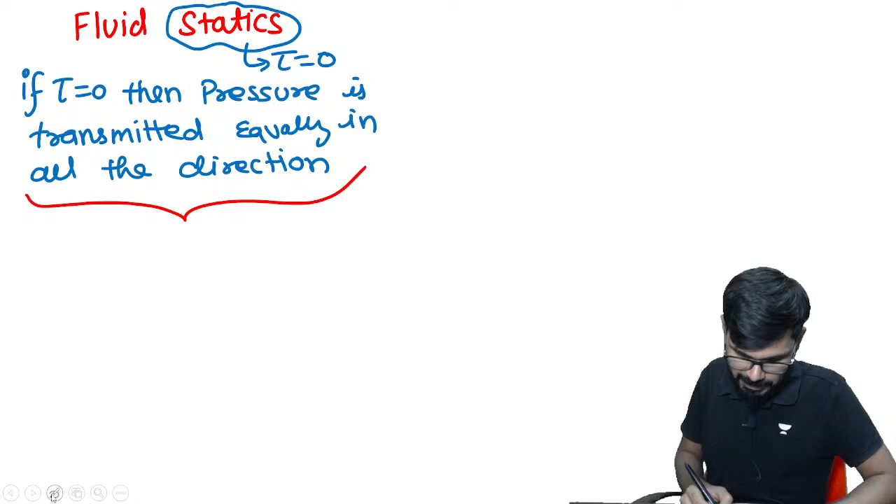So now this is basically known as what? Pascal's law. This is a simple form of Pascal's law, right? Detail we already discussed of Pascal's law. Clear, right? Now Pascal's law is not enough. So here basically one thing I got to know: if tau value is 0 and we are discussing fluid statics, obviously tau will be 0 only, so pressure is going to play a very, very important role.

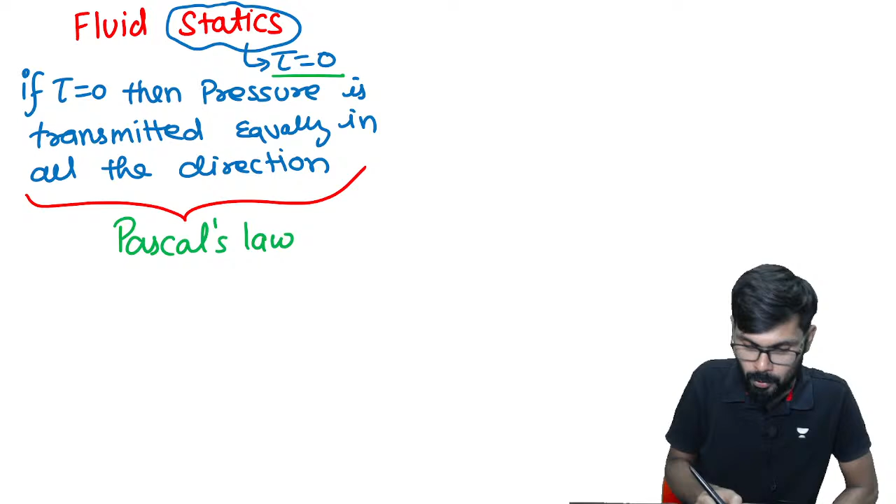So we must know how to measure the pressure, and the measurement of pressure is governed by two basic laws. The most important one is Pascal's law. Another one is hydrostatic law. So what is hydrostatic law? Basically, hydrostatic law says that dP/dH is equal to rho g, or small w. This is basically hydrostatic law.

Hydrostatic law. Now tell me, what is H? Sir, H is the distance. Distance from where and in which direction? Sir, this H is measured from the free surface in the vertical downward direction. If you are moving in the upward direction, then minus w will come. That we already discussed.

Now I'm going to talk about pressure at a point. Suppose this is a free surface, beta. This is a free surface, right? And our point is exactly here.

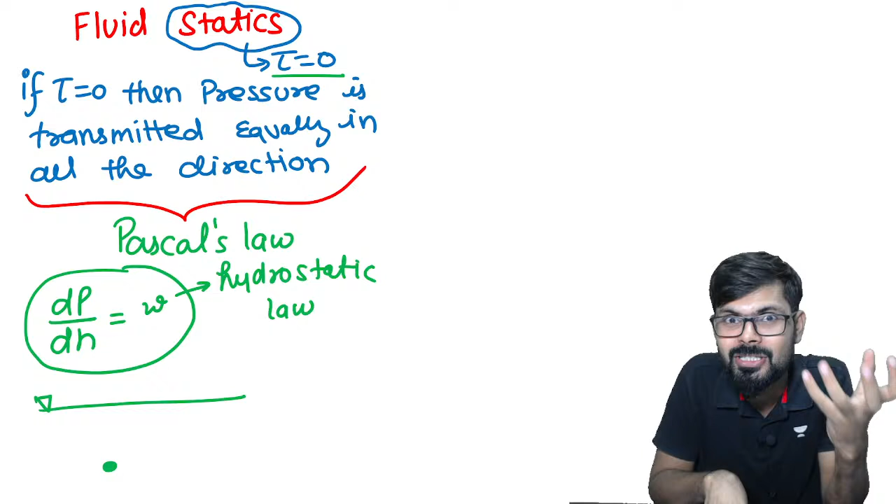Whatever I'm teaching is more than enough. No need to refer any book. Time is gone for referring books; very little time remains if you have just started your preparation. Even for a top rank, PSC or interview, 80% of things will be covered here. Most students studying from YouTube don't value the content because it's free. Don't compare value with the price. The price is 0, but the value is not 0. This is your need, so it has great value for you.

And whatever I'm writing here is basically the short notes. If you study this much, I am damn sure there's a 95% chance you will be able to attempt all the problems of fluid mechanics, and even as a short-term course, you are going to solve at least 80% of the questions. Don't worry, trust me a little. Nobody trusts me. Whatever I'm teaching, that is enough.

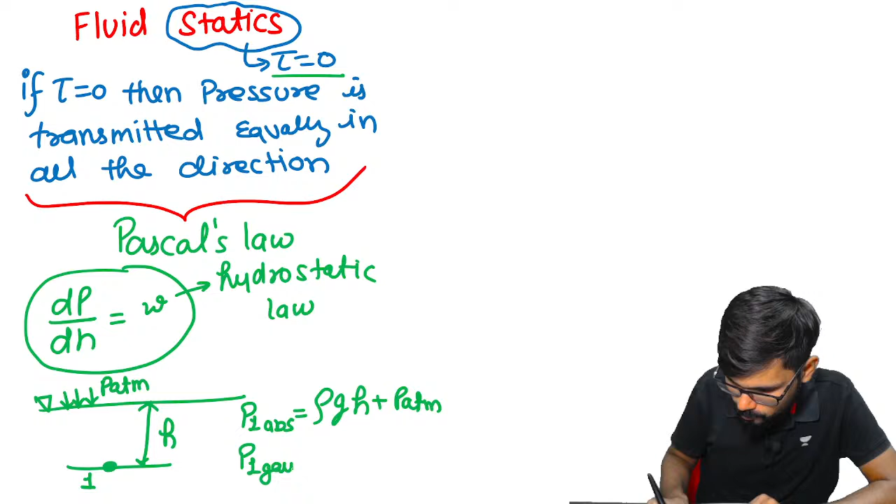Okay, so suppose this height is h. Here the pressure will be P_atm. Let's say this is point 1. At point 1, if I calculate the absolute pressure P1, I'll get rho g h plus P_atm. Now if I'm calculating P1 gauge, then it will come rho g h. Clear?

Clear hai? Any problem? No problem at all. Okay. Good evening. Good evening.

Good evening. Now please listen here carefully. This is all about Pascal's law and hydrostatic law. That is going to be useful for us. Now one more thing I would like to share here, that there are 7 total units. Units are very important.

The first unit is Newton per meter square, I told you. Second unit is, I told you, Pascal, correct na? Third unit I told you kgf per centimeter square. I'm not writing the conversion, that we already discussed. So this is kgf by centimeter square.

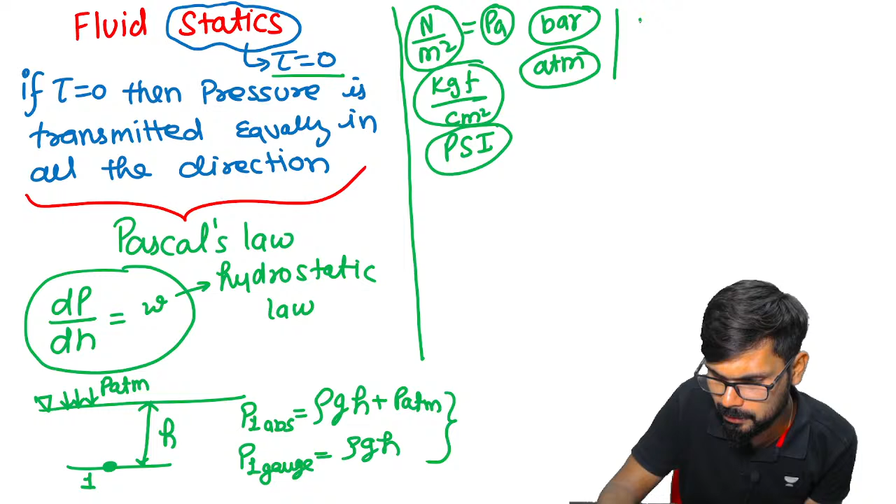Now the 7th unit is what? 7th unit is basically height of liquid column. This is very important. Height of, or length I should write here, because it's not necessary to be height only, it may be inclined also. The length of liquid column. Clear hai? Now please listen here.

Any pressure can be represented in terms of any liquid column. Suppose what is atmospheric pressure? Atmospheric pressure is 1 atm, or you can say 101.325 kilopascal, or 1.01 bar. Similarly, you can convert in psi and kgf per centimeter square. Now the same thing can be written in terms of height of water column also. How?

See, P is equal to rho g h, right? Now P value is how much? Here P is basically atmospheric pressure, so P value is 101.325 kilopascal. Rho value, let's say I'm writing water column, so it will be 10 to the power 3. g value is 9.81 into h. So from here you will get h value of about 10.3 meter.

So 10.3 meter is also unit of pressure. But you cannot say 10.3 meter, you have to say 10.3 meter of water column. So same 1 atmospheric pressure can be written like this. This is 1 atm only. Similarly, let's say P is equal to rho g h.

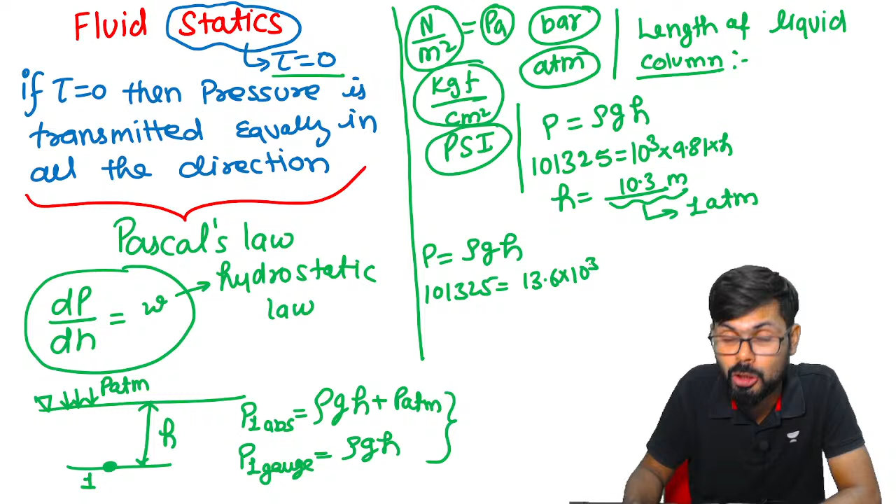I am taking P value as 101.325 kilopascal. Rho value is 13.6 into 10 to the power 3, because I am writing in terms of mercury column, then it is 9.81 into h. So h value will come 0.760 meter. So this is also 1 unit. Clear hai beta? Any confusion? No confusion at all.

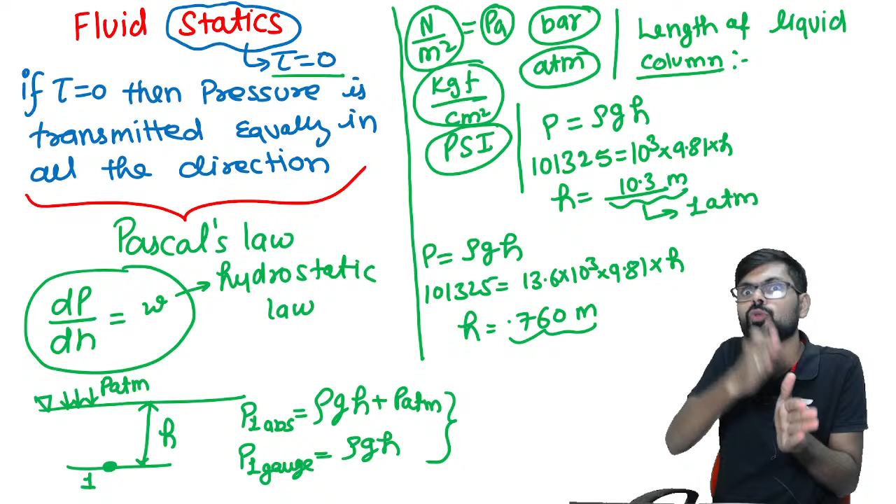Now we have two things. We can write same pressure in terms of water column, that will come 10.3 in our example. Same thing we can write in mercury column also, 0.76. So if I want to convert one water column to mercury column, how should I do? For that I told you, very simple: rho1 h1 is equal to rho2 h2. I'm not proving it again.

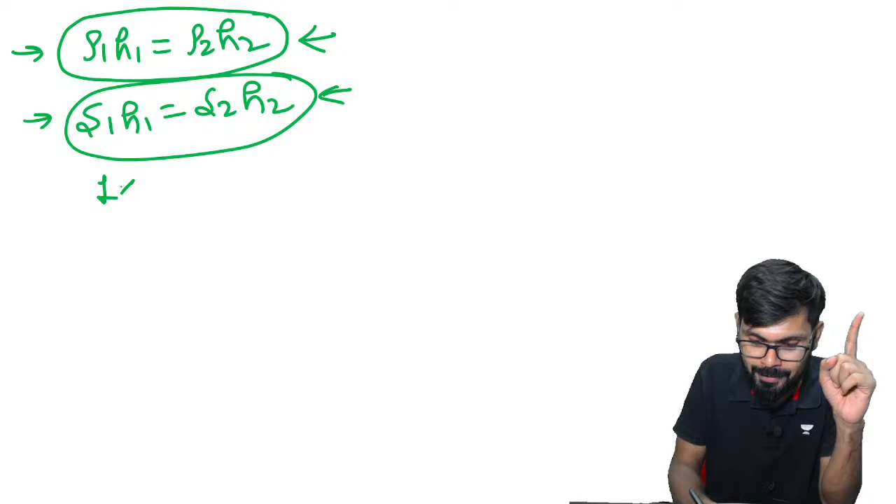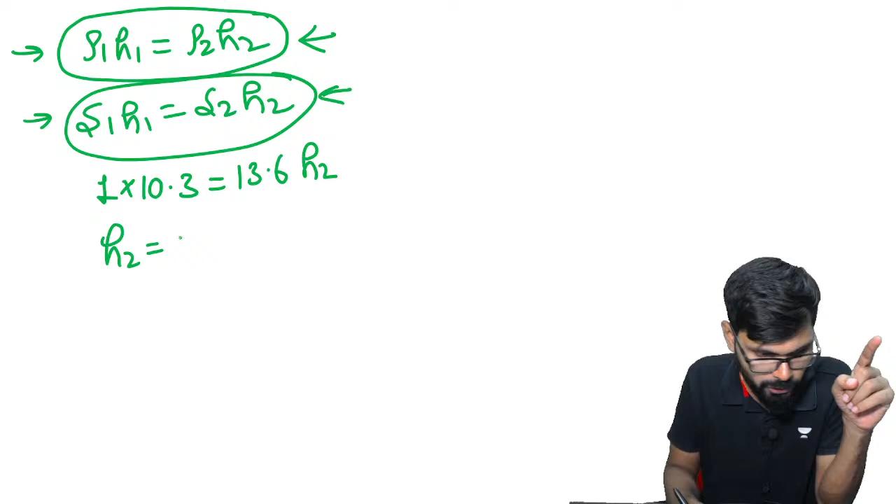Or I can say S1 h1 is equal to S2 h2. Let's say I know water column and I want mercury column. So what is S1 value for water? That is 1, specific gravity is 1 for water. h1 value is 10.3, equal to S2, which is mercury, 13.6, into h2, which we need to find out. Just calculate, you will get 0.760 meter.

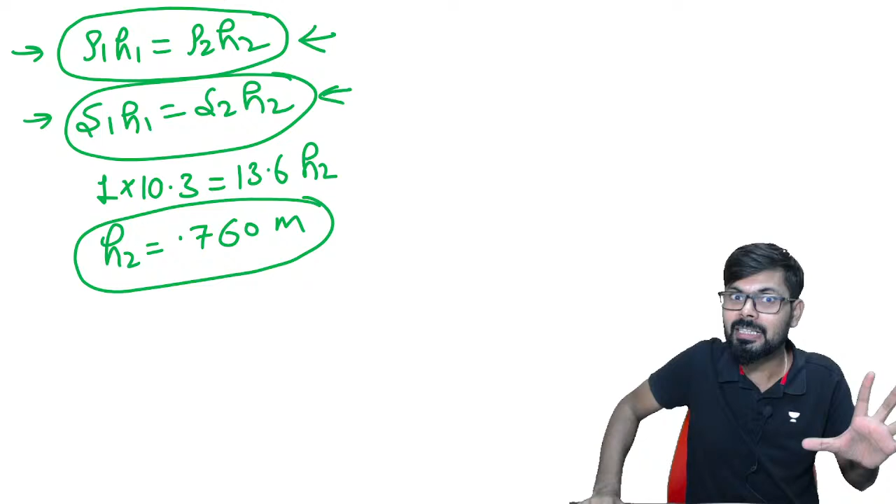Now I am going to tell you one very important concept. Just you must know it, because otherwise someone will ask you how it is possible, then you don't have any answer. See, what I'm trying to say is that the pressure at a point is going to depend upon the height of liquid column, not any other thing. It will not depend upon the shape of the container or something.

Please listen here carefully. To make it understand, I'm going to draw 3 things. I'm going to draw like this. One container I have like this. Correct. Another container is like this. Okay. Another container is, okay. Let's talk about these 3 shapes. Forget about this. Let's talk about these 3 shapes.

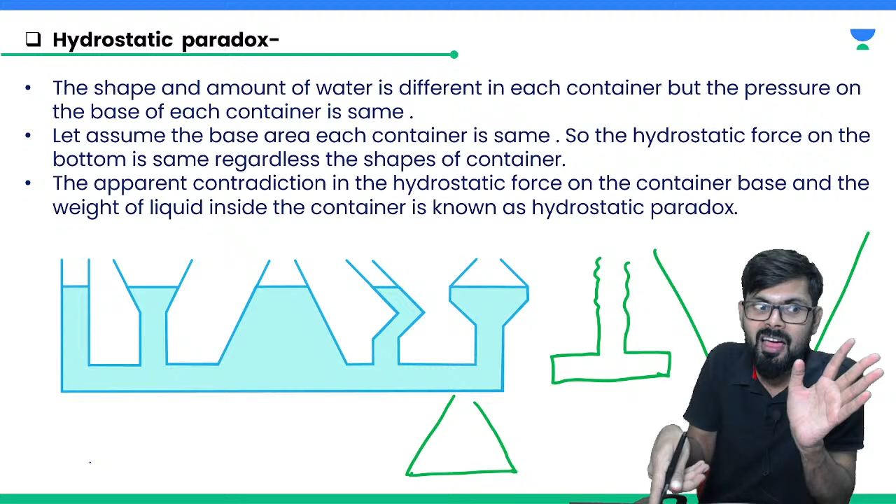Now what I'm going to do is I'm going to fill, let's say, water in all these 3 containers. This is a first container, this is a second container, this is a third container. Now I am going to fill the water in all the containers. Okay, this is one. Same level water. This is water. Forget about 2 and 3. Only we talk about one.

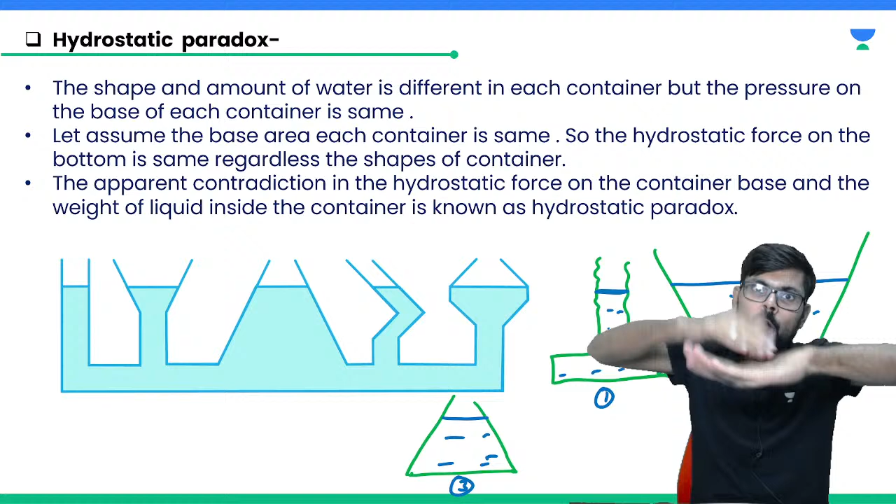My question is, whatever bottom है ना, the bottom contains how much water? That is the amount of water. So basically whatever force is going to be exerted on the bottom of the container is always equal to the weight of the fluid.

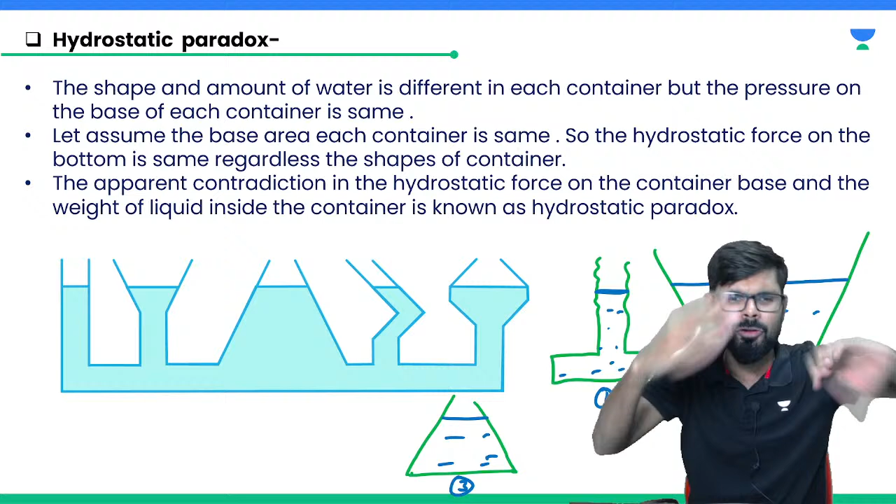Interviewer will try to confuse you like this only. First he will ask that, अरे भैया कंटेनर है, इसमें 1 kg water है, so obviously at the bottom of this one, the total force will be equal to the weight or not?

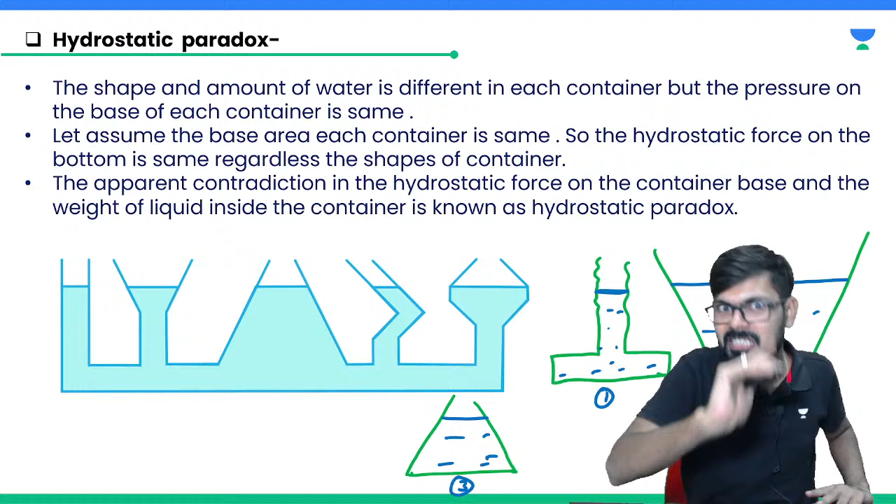Please listen here carefully. Now in this one, let's say 100 grams water is there. Level is same. This level is H. Right? Now, this level is also H. But here water is huge na. कितना? 1 kg. Here 500 grams. अभी मजा आ जाएगा.

Now, let's say the area in all three is same. This area is equal to this area is equal to this area. All area is same. All height is same.

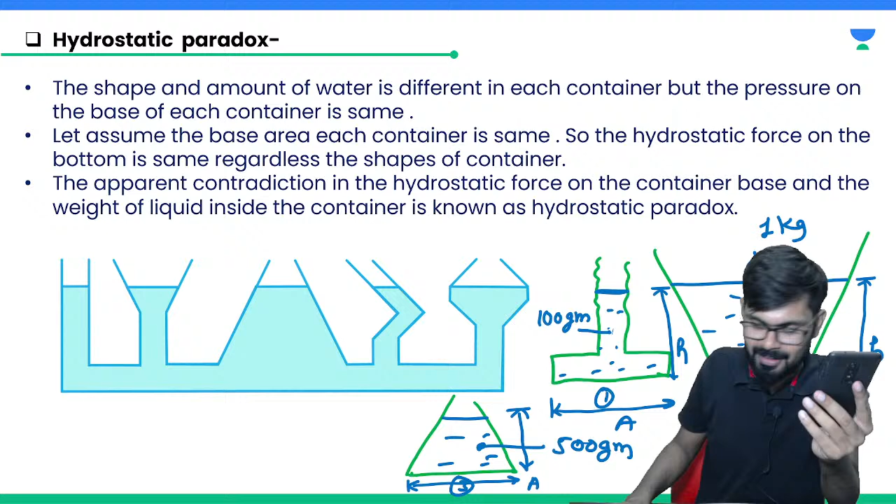Whatever I said, that is correct, na? Again I am repeating the statement that in first container the force, I am not talking about pressure, I am not talking about pressure, force in the bottom is 100 gram. In second one 1 kg. In third one 500 gram. Is it correct or wrong?

No, volume will depend upon the shape na Balaji, volume is different. Area is same, height is same, but volume is depend upon the shape na. You cannot say that it is length into width. Area into length, you cannot say volume.

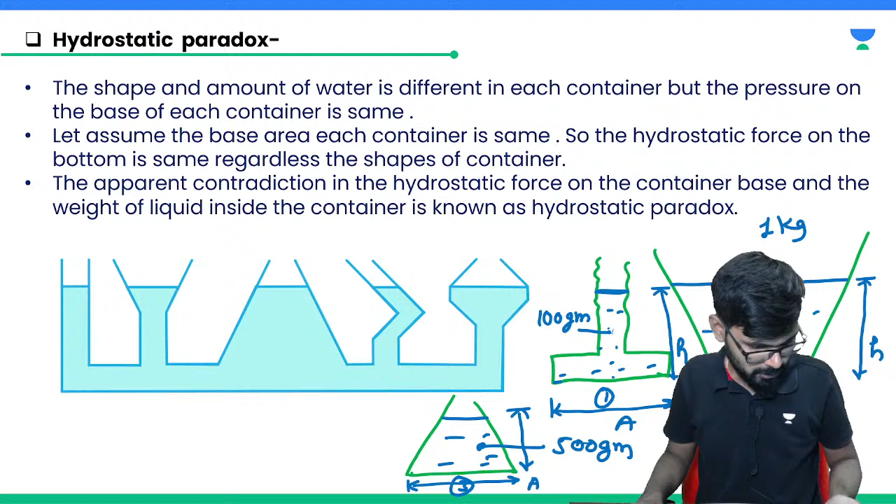Now few people are saying that sir, here the force will be same because pressure is same, P is equal to rho gh. How? Sorry sir, clear sir. Yes yes, bolie.

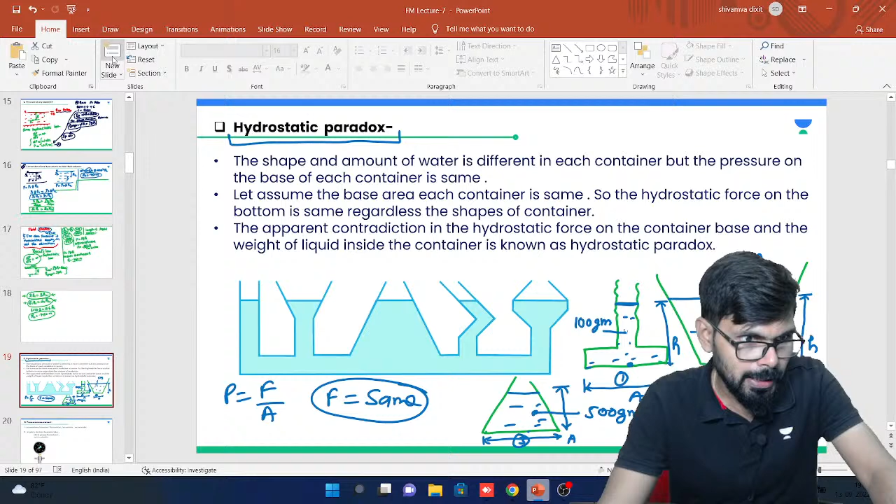If someone try to make you confused, then you have to give this particular name. You have to say that it is a hydrostatic paradox. Please listen here carefully, everyone. So basically here force is going to be same, right? Just a minute. I will just add one slide to make you understand. Please listen here. Those are same height and area, so gravity act as equally.

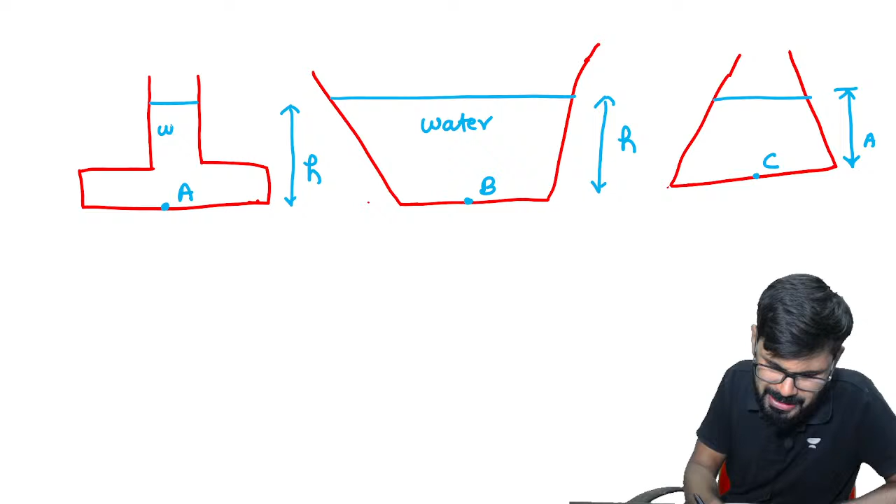Okay, this point is, let's say, A, this point is, let's say, B, this surface is, let's say, C. So now if height is same and everywhere water is there, this is also water, same fluid basically. Now, so basically, listen here, PA is equal to PB is equal to PC.

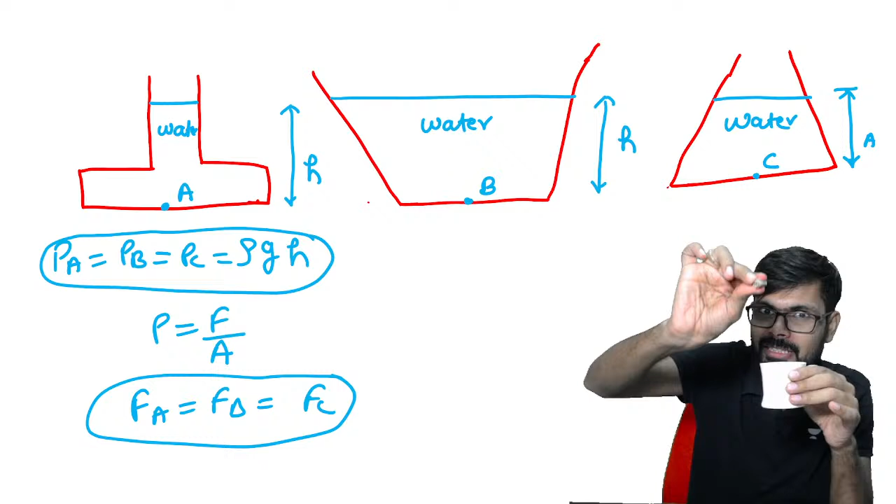If suppose here liquid is there, I am putting one hole, liquid will come out. Conclusion is that fluid is going to exert the pressure on the walls, the solid is not exerting. Solid is only in the contact, it is just touching. If solid is just touching the wall, then it will not exert any force on this unless some obstacles are there, right? But in case of liquid, even if it is just touching, then also it is exerting the force.

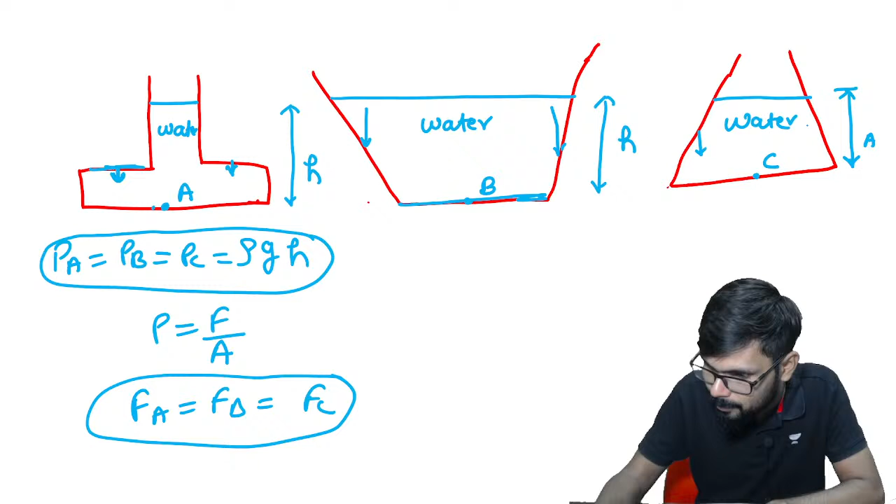So because of these reactions in fluid, that is Pascal's law, that's why this law is needed, that's why this contradiction is going to be clear by the hydrostatic law or Pascal's law basically. So if someone is asking you, this is only interview, there is no question related to GATE. If in interview they are asking why this contradiction is there, it's Pascal's law.

According to Pascal's law, this liquid is going to exert pressure not only on the bottom, it is going to exert in all the directions, and when it will exert in other directions, the solid surface in the other direction will produce the reaction also. If you calculate all these reactions, then the equation will be balanced. Don't worry about it. Okay? Understood?

There's no need to be afraid of the interviewer. Don't worry. And one more thing I'm telling you - if they ask something you don't know, then you have to bring it into the fluid mechanics area.

I hope you understand this. Suppose you are sitting in an interview. The interviewer asks you the first question from strength of material - you bounce. What happened? Bounce. You are not able to answer. Next question he asks, again strength of material, again bounce.

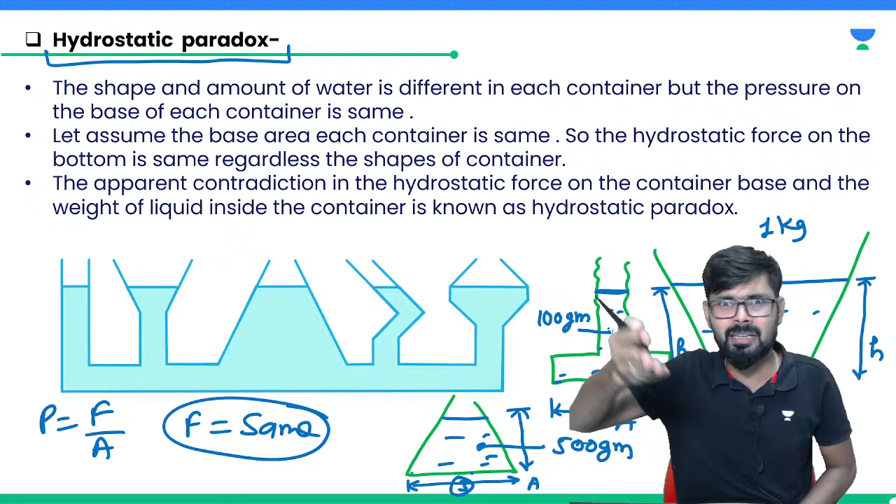At that time we started discussing this. I have that notebook, and whatever questions he told me, I wrote every question. So if you want to meet me at the Hyatt or the Taj or somewhere else, only one thing is required - what is that - rank. I'll share the rankers' photos with me at the Taj - Hyderabad Taj Krishna, Taj Deccan - I used to go to all of them with my students. Because once you get a job, an A-level job, officer grade job, or get into IISc Bangalore or IIT, after that you are not my student, you are just my friend. Then we'll go and chill, just chill.

Okay, clear? Okay, so this part is done. Let's come to pressure measurement now. For pressure measurements, basically two types of devices I am going to discuss here. One is conventional devices - some conventional devices are there, right?

Another one is modern devices, which are mostly used nowadays. Conventional devices like piezometers are there. Piezometer I will discuss, that is the most simplest device to measure the pressure.

The next one is barometer. Barometer is used to measure the atmospheric pressure.

And then another one is manometer. This is most important for us. Manometer have two types: one is simple manometer and another is differential manometer. I'll discuss, don't worry, because this is the most important one.

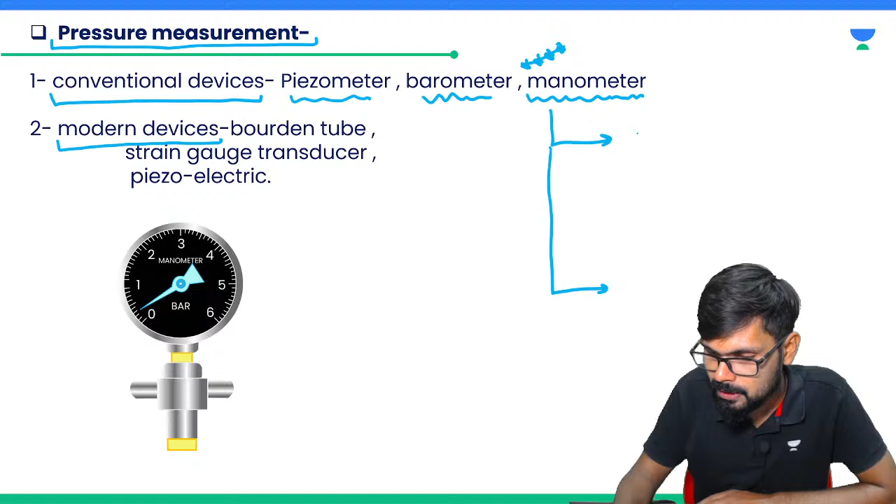Simple manometer and differential manometer. So still, simple also have 3-4 types.

3-4 types like U-tube manometer, inverted U-tube manometer in series, then single column manometer, then inclined column manometer. So these are the simple manometers.

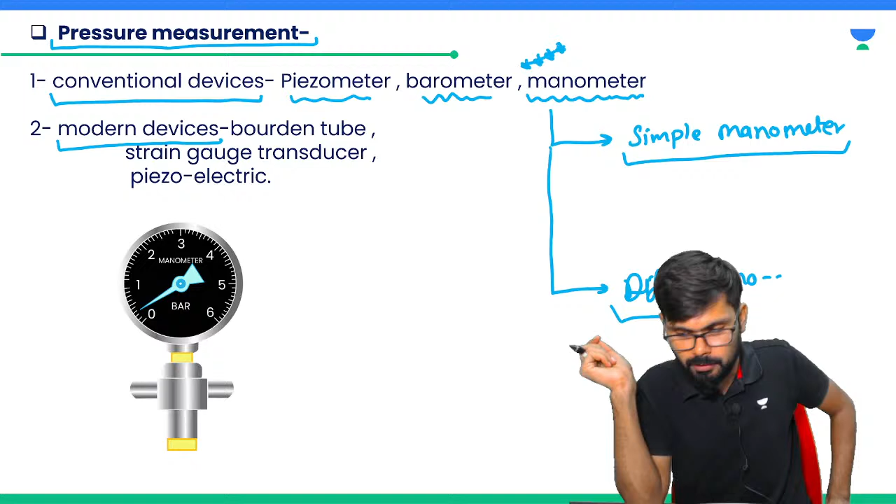Simple manometer means the manometer which are measuring the pressure at a point. What is the difference between simple manometer and differential manometer? Simple manometers are measuring the pressure at a point. Differential manometer is basically measuring the pressure difference between 2 points.

Okay, now some modern devices are there like Bourdon gauge, Bourdon tube. Strain gauge transducers are there, these are basically sensors. Piezoelectric sensors are there to measure the pressure.

But this is clearly not important for GATE, only for ESE. So in our plus platform, I will give you the idea about all these three. But here I am not going to teach, because for GATE it is clearly not important, and currently we have restrictions on number of hours, so I will not cover this particular part here.

I'll cover these three, correct. And 99% chances question will come on manometer only, especially U-tube manometer and different arrangements of U-tube manometer.

Sir, U-tube manometer I studied, but you did not study why we are using inverted U-tube manometer, how to measure vacuum pressure through U-tube manometer, why we are using, what will happen if I use U-tube manometer in series.

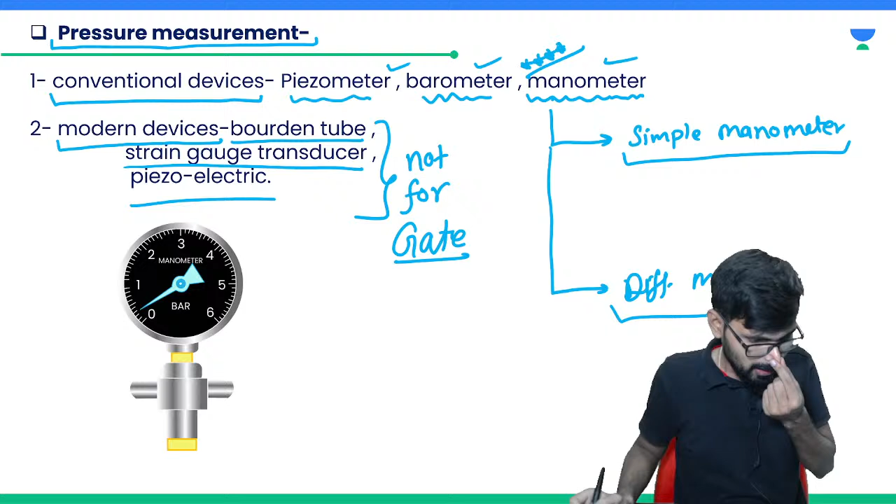80% questions will be solvable if you are only attending the class, not studying anything at home, only attending the class, making the short notes and solving the problems which I am going to solve. I am challenging that 80% questions you will be able to solve. Means out of 8 marks of fluid mechanics, you are going to get minimum 6 to 7 marks, 6 marks minimum you are going to get. This is my promise, I never break my promises.

You can ask any of my girlfriend, I'm telling you, right?

So these are basically simple manometers. Simple manometer means manometer which are measuring pressure at a point. So these are basically U-tube manometer, single column manometer, inclined. In U-tube also a lot of arrangements are there, different arrangements are there. Why those arrangements are there, how to use that, everything I will tell.

Next, differential manometer. Differential manometers are basically measuring the pressure between 2 points. These are 2 piezometer method - take 2 piezometers and use them. Then another option is U-tube differential manometer. U-tube manometer can be used as a differential manometer also.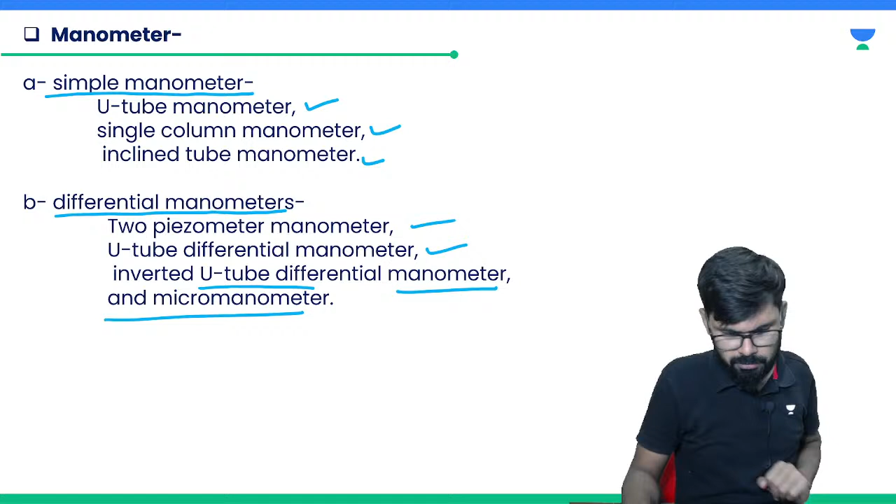Then inverted U-tube differential manometer, that also has some significance, I'll tell you. Then other micro manometer, but micro manometer is clearly not required, but okay, we'll see as per the time. The most important ones are this one and this one.

These three are very, very important. So these three will follow.

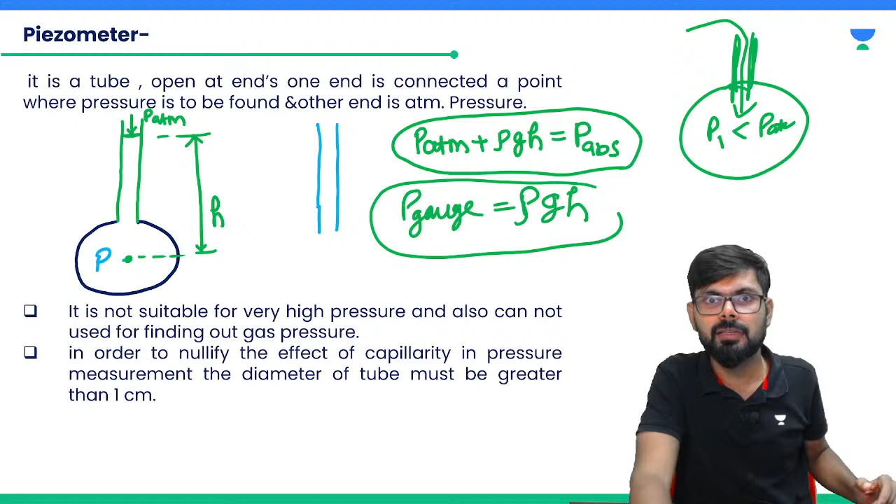Let's come to another one first. Before discussing manometers, we'll try to discuss one more thing. Now please listen here carefully. Before discussing the U-tube manometer and other types of manometers, I would like to tell you about the barometer, because many students are always confused about how this barometer basically works. Most of the students are confused at this particular point.

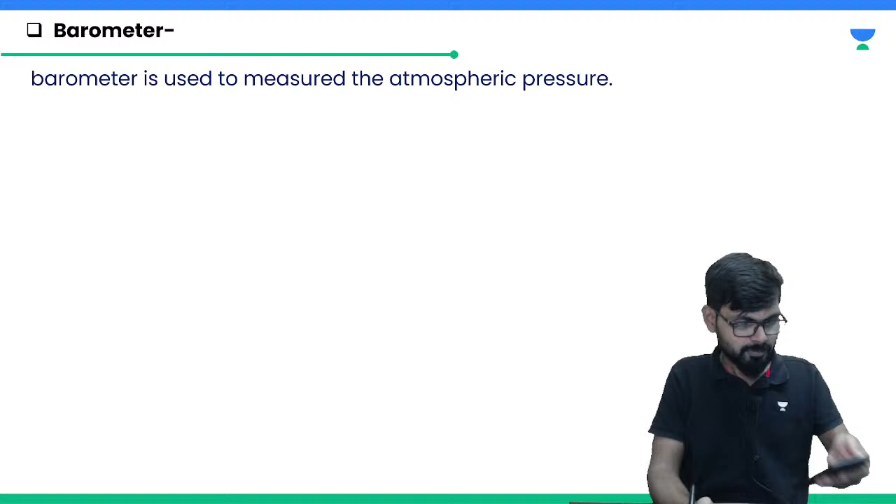Now do one thing. The barometer is a very simple device. Very simple device, no problem at all, right? And what is this actually? Basically, we have one tube like this.

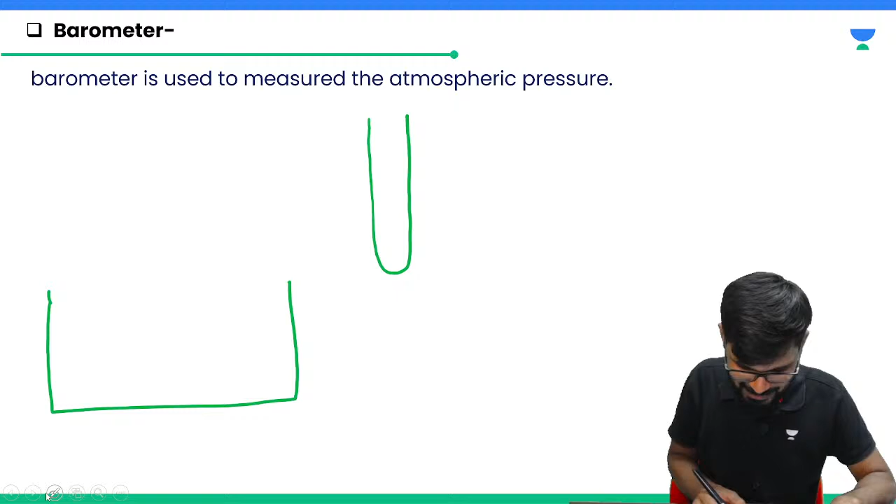We have one tube like this, correct? And we have one container like this. Please listen here carefully. Sir, container में क्या है? What is there in the container? Container में mercury है. Hg. Sir, what is there in the tube? Tube में भी mercury है up to the top. Hg है.

Now we have one container and we have a tube, right? And in both mercury is there. Why mercury is there? I'll tell you. Now what I'm going to do, I'm going to put this tube inside a container of mercury, and then I will invert it.

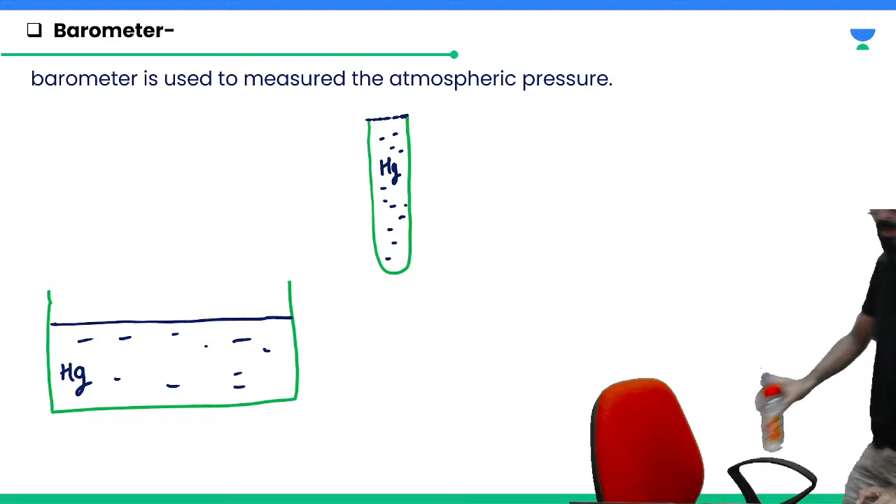Just a minute. This is an important concept. Okay. So now what I am going to do is, suppose this cup is there. This is a container, और container में भी क्या है? Water है.

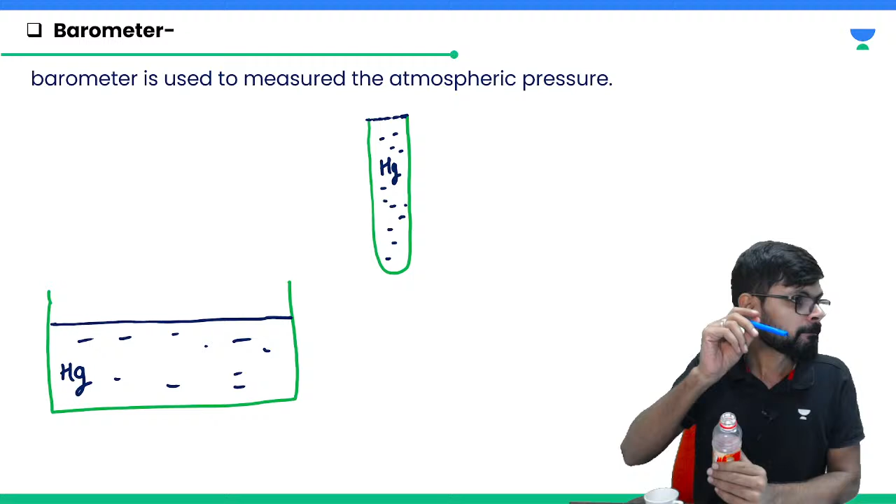This is a container. Here also mercury is there. Now what I will do is, it is completely filled, एक भी जगह नहीं है खाली, it is fully filled up to the top. I'll put my finger here. I'll invert it. First I will invert inside the water. See, अब ये transparent नहीं है. Then I'll remove my hands. Basically I am going to invert this in such a way that no air should enter.

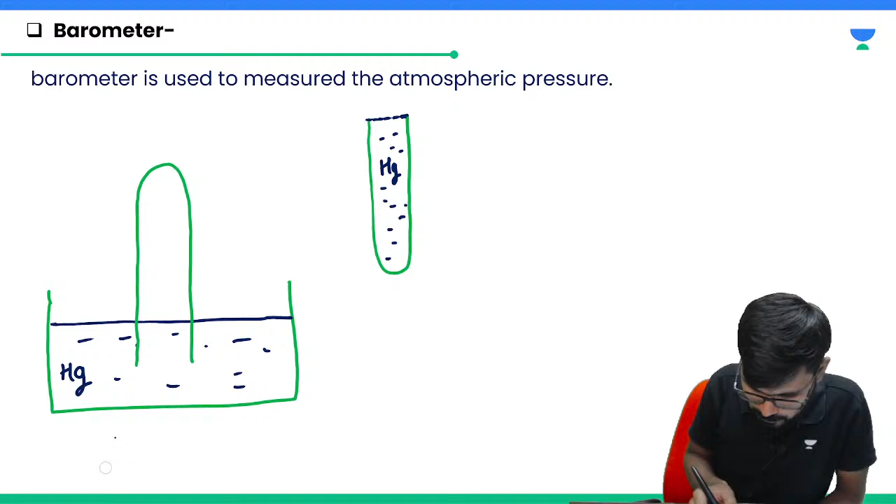Then here some height, up to some certain height. Mercury है ना, so it will come in this particular shape only, right? कितना भी बड़ा ट्यूब, उससे फर्क नहीं पड़ता. Nothing.

इधर देख लो बेटा. I am arranging one session with one of my friends. He is also teaching in Unacademy, and we have a friendship from the last 8 to 9 years. He is from CS background. So we are going to do one session, वहाँ पे मैकेनिकल और CS का discussion होने वाला है. Then we'll see who is going to win.

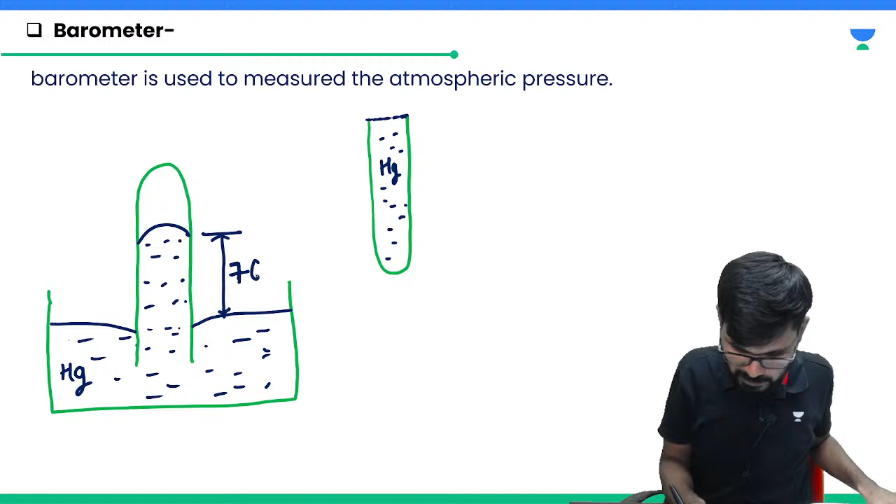Okay, so now this will be something like this, right? Now please listen here carefully. This height, when you measure it, if you are measuring the atmospheric pressure at sea level, अभी पहाड़ पे जाके नहीं, then this value will come 760 mm. Don't worry, it will come.

Now what is here basically? Sir, air has not entered, obviously. Air has not entered. So what is there here, right? So here basically vacuum is there.

Vacuum is there, right? यहाँ पे क्या है? Vacuum है basically. अब ये जो vacuum है, that is, perfect vacuum is not possible. So here also something may be possible. So what can be there? That is my question. Tell me, what can be there, beta? Tell me, everyone.

What I am asking is that here air is clearly not there. You know that perfect vacuum is not possible, right? So my question is that air नहीं है, आदर्श. Air कैसे चली गई? When I am putting my finger here and then closing it, how will air enter? Tell me. Vapor. Vapor of what?

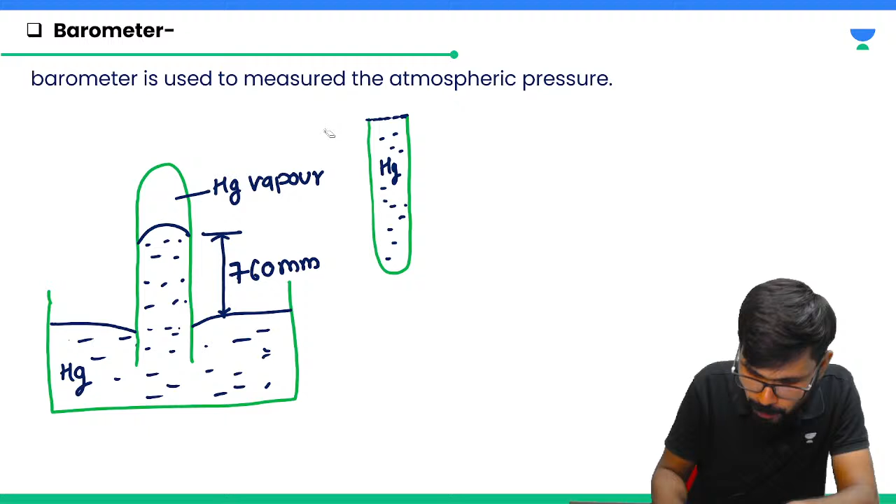Yes, very good. Mercury, very good आदर्श, great. Now please listen here, सारे लोग ध्यान से सुनेंगे. So obviously here what is there? Vapor is there. And which vapor? Basically यहाँ पे mercury vapor, Hg vapor है. So it is not perfectly vacuum. It is Hg vapor basically.

Now Hg vapor pressure is very low. The partial pressure of the vapor will be 0.16 bar. This is the highest pressure that can be there, in saturated condition; it may be less than that also.

Now if you use any other fluid, that vapor pressure will be high, so here pressure will be more. That is why mercury is the best fluid for manometry, because its vapor pressure is very less. Clear है बेटा this point? Okay. Now how to measure this? Here pressure is PATM. PATM से start करेंगे.

अच्छा, this is called as Torricellian vacuum. I'm writing here: Torricellian vacuum. Tube at the base of the container is not necessary. It will come this much height only, don't worry.

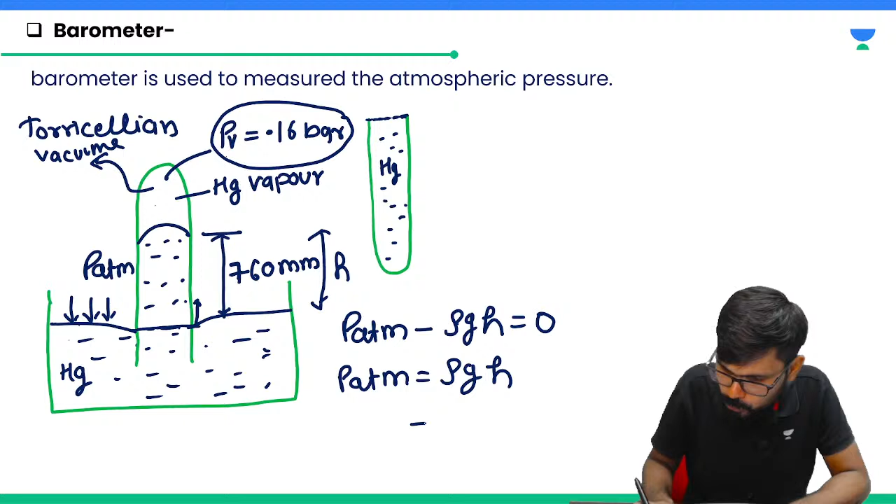So I started from PATM, moved upward h distance, and it will be 0. So PATM minus rho g h equals 0, so PATM equals rho g h. Now put the values: rho is 13.6 into 10 to the power 3, g is 9.81, h is 0.76. So this value will come how much? I think 101,325.

So like that you can measure. Now if you go to a mountain, for example, pressure will be less. If you want to measure the pressure at the mountain, you have to do the same thing. Only thing is this height will automatically come less in that case.

ये liquid ऊपर क्यों जा रहा है? This liquid is maintained at this height because PATM is pushing it upward. अब जब PATM ही कम होगा तो height भी कम होगा. Very simple.

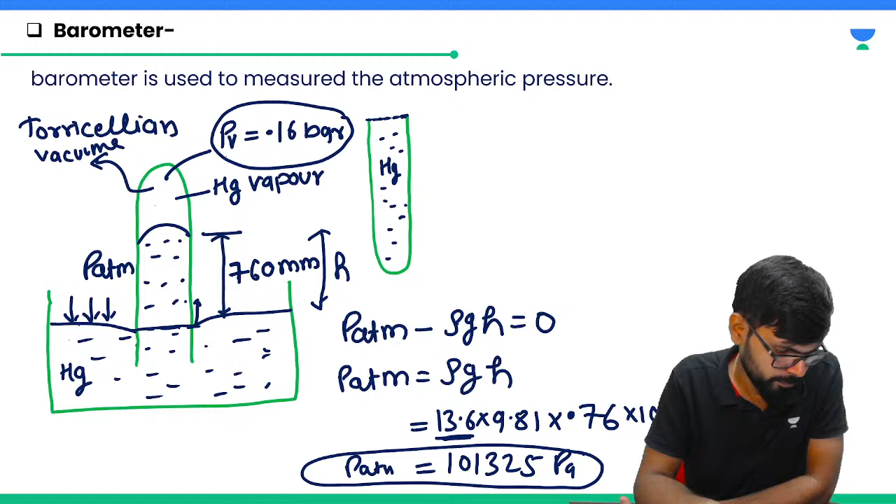Okay, how many are there who don't understand Hindi even a little bit? Just for information, nothing personal, so accordingly I will use Hindi. How many don't understand Hindi at all? Balaji, okay, Balaji, you are my favorite student. Any other one? Okay, only Balaji is there. Hari Krishnan, you know? Little bit can manage. Raini, okay. Kalam also doesn't know. Okay, Ramakrishna. Fine, no issue.

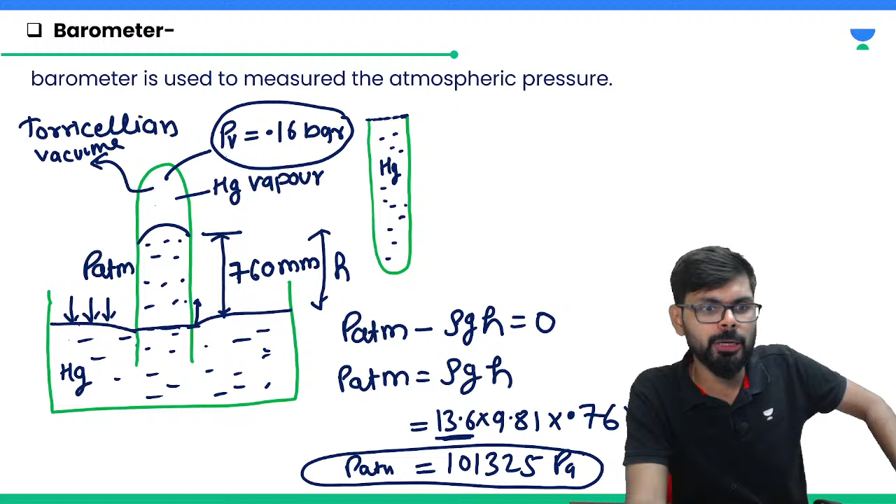Clear, beta, barometer? How a barometer is used to measure the PATM? Clear? Same thing as what I made, same thing here. Clear? Shall I move to the next?

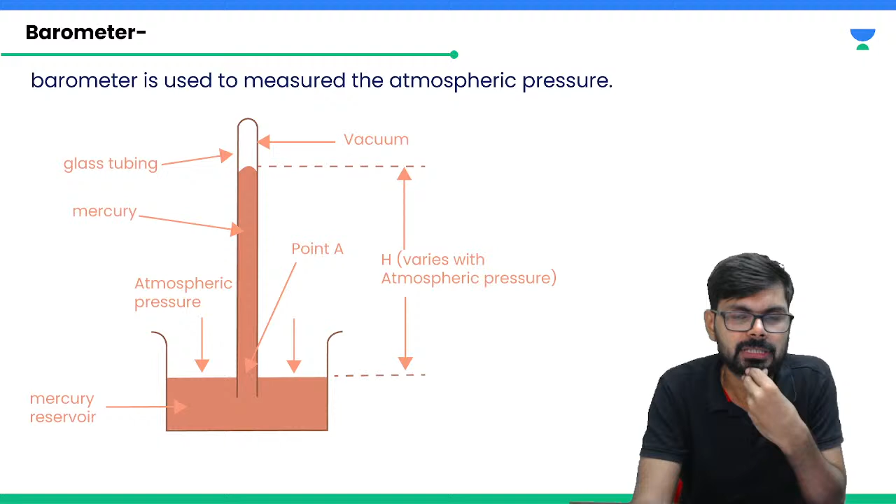Now I am coming to a simple U-tube manometer. Please listen carefully. What is a simple U-tube manometer? See, a piezometer is a straight tube. This is just a tube which is bent. Look, what is this? This is a piezometer, right? Just try to heat it here.

Diameter of tube. Okay, one thing I forgot. Kalam is asking what should be the diameter of the tube. The diameter of the tube must be greater than 1 centimeter or 10 mm. Why? Because if it is less than 10 mm, capillary effect will be there. Whatever height is there will not be accurate; some height will be because of capillary effect. So your measurement will not be correct. So this is a piezometer.

Do one thing, heat it a little. Just start heating up, and after heating, try to bend it also. So finally it will look like this one. U-tube. Now one very important point: the shape is different between the piezometer and the U-tube manometer.

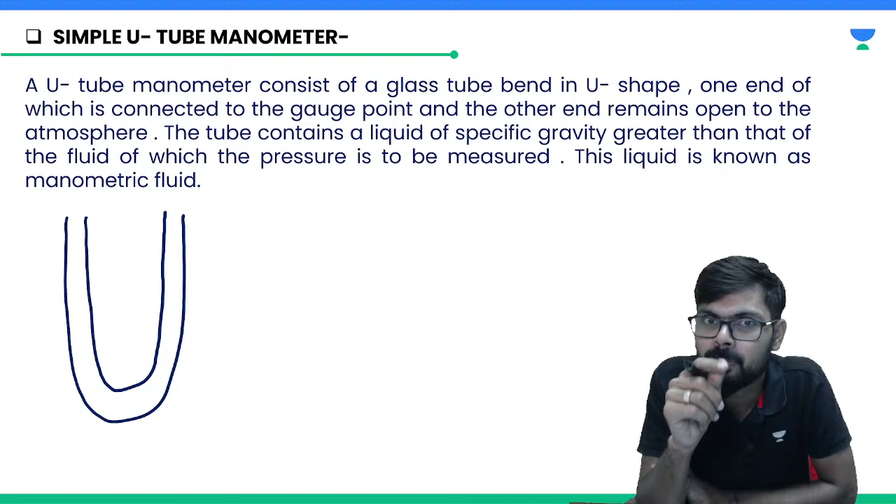Second thing is, in a piezometer, the manometric fluid is nothing but the fluid whose pressure we are measuring. In case of a piezometer, the fluid whose pressure we are measuring is the manometric fluid. But here the manometric fluid will be different. Some fluid is filled here. That fluid is basically what?

Mercury. Why mercury? I told you one reason, that mercury has very low vapor pressure, so very low pressure can be measured. But I'll explain in much more detail why mercury is the best manometric fluid. For the time being, just understand that here we have mercury filled.

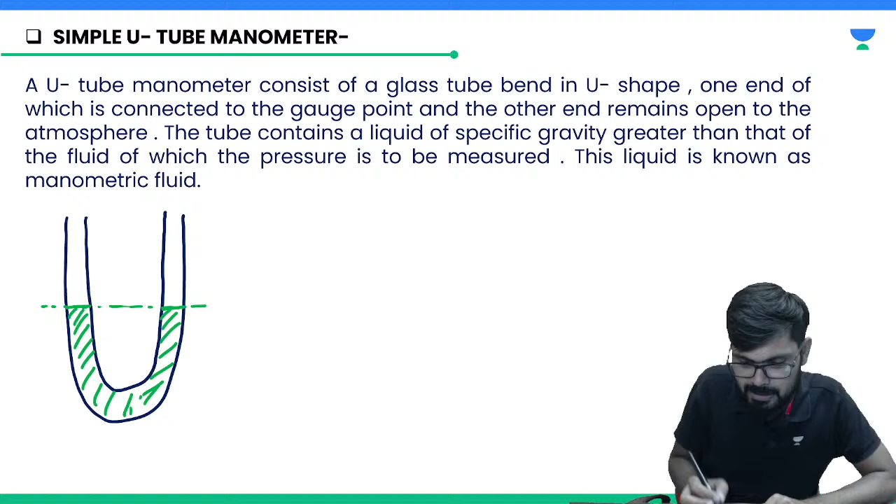Now, if it is not attached, if it is simply like this, its height will obviously always be the same. Why? Because here the pressure is PATM, atmospheric pressure, because it's open to atmosphere. This is also PATM. So this height will always be the same. This is the manometric fluid.

Now suppose I want to measure the pressure at a certain point. Suppose I have this container and I want to measure the pressure here. To measure this, I am going to attach a U-tube manometer. I will make a small hole right here, and here I'll attach one U-tube.

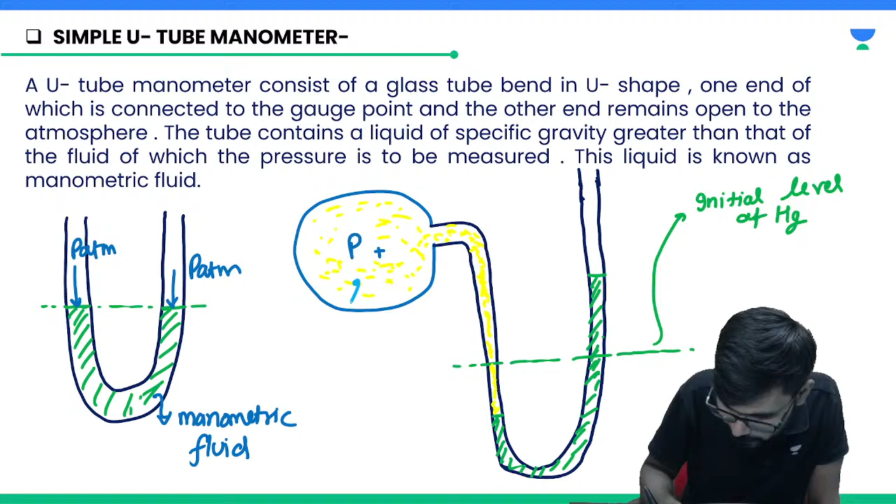Please listen here carefully. This fluid's density is rho, right? And this fluid is manometric, rho m. Now please listen here carefully.

Here 2-3 methods are there basically, but I am going to tell you only one method, that is enough. Why unnecessarily study 2-3 methods? So if you want to draw this diagram, you can draw. Okay, I'll copy this. Can I copy this?

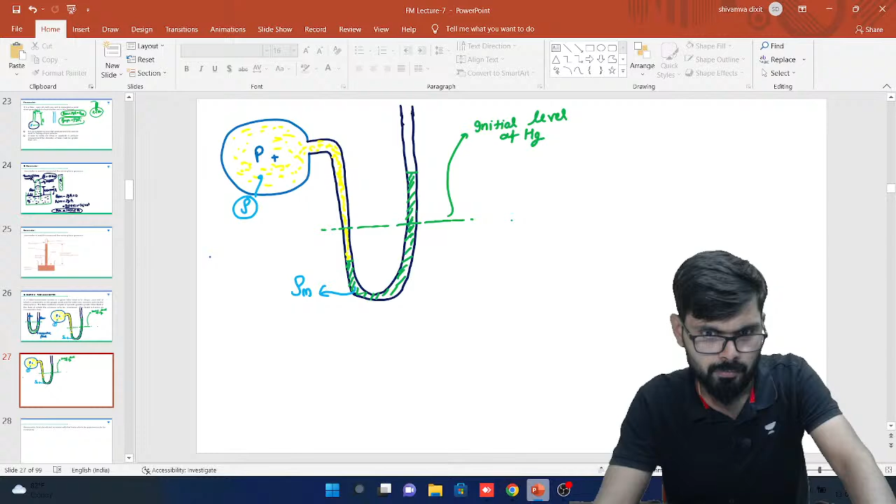Clear hai beta? Okay. Now please listen here. So we have here one U-tube manometer, in which some mercury, manometric fluid, is filled. Initially when it is not attached, the level will be same, because the pressure in both limbs is same.

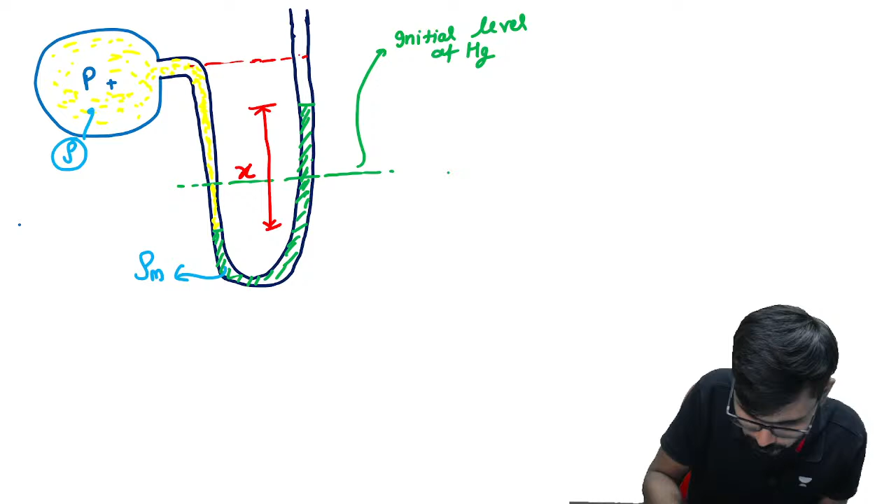Same. Now I want to measure the pressure in the container, and in this container pressure is more than atmospheric. So we attach this, then it will deflect like this. So now how to write the equation. Let's say this distance is x. We can simply measure it. This is x and this is y.

Now let's start from here, at this level. Here pressure is P, right? Now from here I am going downward. Downward means pressure will increase. So I am going downward up to here. When I reach here, how much will the pressure increase? When I am going downward, a positive sign will be there.

So here pressure is P. Now I am going downward, so plus, and which fluid is here? Rho. So rho g (x plus y). Now you reach this point. You need not go down; you just jump from here to here. Whenever you jump, make sure only one fluid is there at the bottom. Only then pressure will be same.

Rho gh will go down, then again rho gh will go up. Same thing. Let's say this distance is t. So what will you write here? Okay, I'm writing. See, I started from here, I am going down. So up to here, P plus rho g (x plus y).

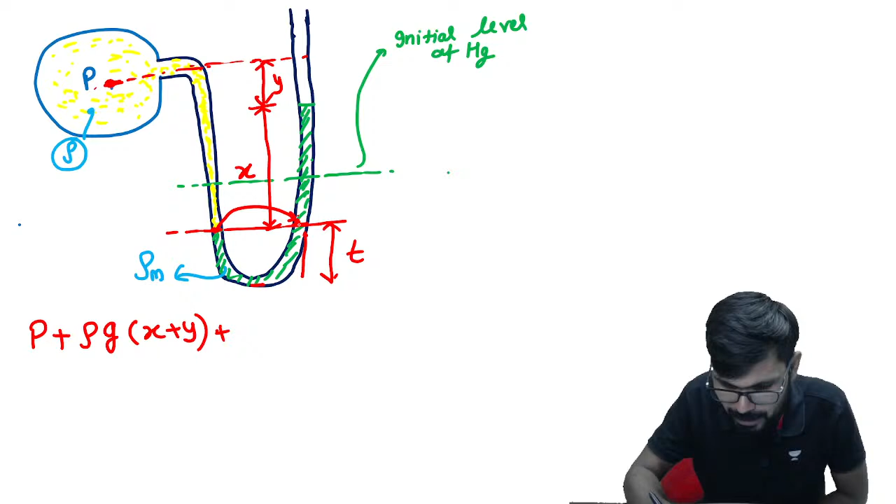Now we are moving upward. Upward means minus. How much upward do you have to travel? X distance, and there is manometric fluid. So minus rho m g x is equal to the pressure where we reach. At this point, what is pressure? P atm.

Now you can calculate the P value for gauge pressure. P atm value is 0. If P atm is 0, P gauge will be rho m g x minus rho g (x plus y). So this you can calculate.

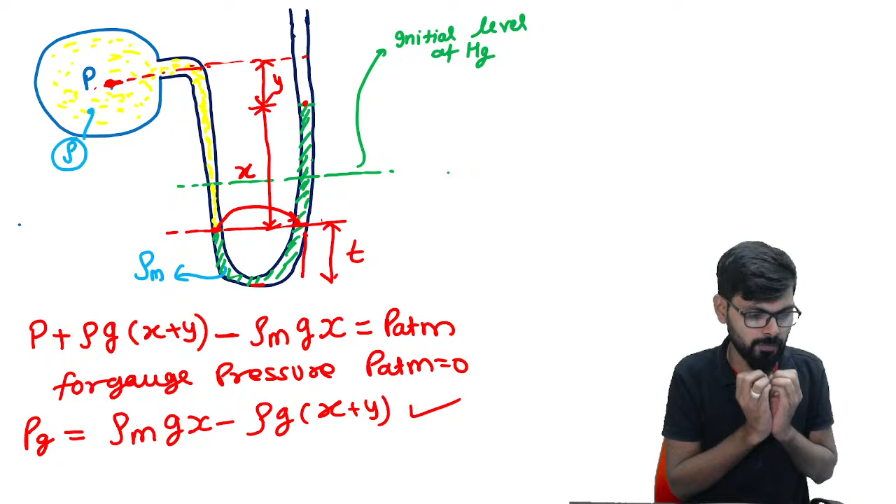Clear? Okay, so basically we understand what is the manometer. Now one more point you need to understand: manometric fluid should not mix with the fluid whose pressure is to be measured. This is very common. Suppose the manometric fluid you are using mixes with that fluid, then how will you identify what is the distance? So that is not possible. So there are two characteristics I told you.

The first characteristic: whatever manometric fluid you are using, its vapor pressure should be as low as possible. And the minimum one is mercury only. That's why it is best.

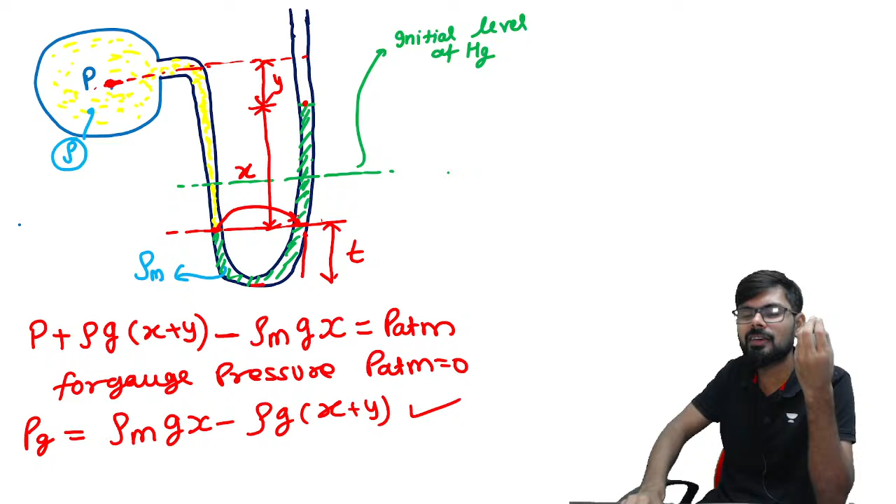The second thing is that it should not mix with the fluid whose pressure we want to measure. Now, when it should not mix, mercury is again one of the best. Why? Because mercury does not mix with most fluids. Even rarely any fluid can mix with it, because there is a lot of density difference.

Now in a piezometer, basically P is equal to rho g h. But here rho m is coming, so rho m is 13.6 times more than water. Suppose this is water and you are using a piezometer, then it comes P is equal to rho g h. But here rho m is involved, so rho of mercury is 13.6 times more than water.

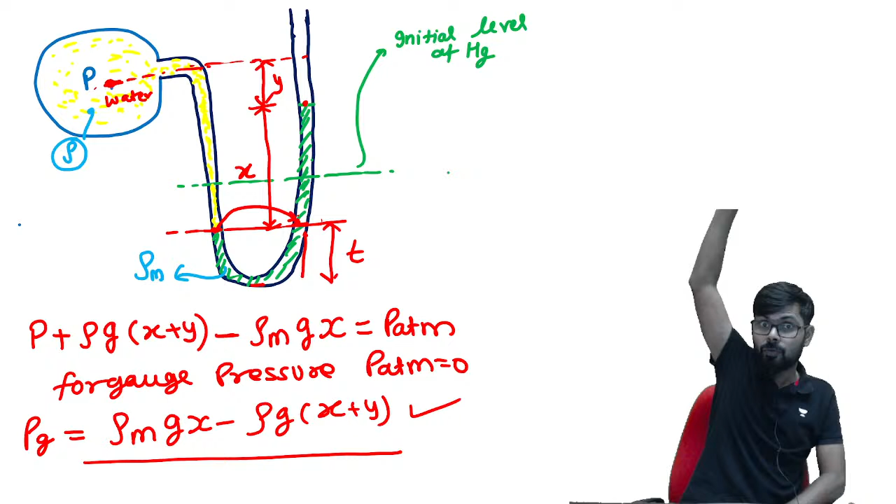So it simply means that whatever deflection is coming, even though pressure is very high, the deflection will be very less. If you compare with water, deflection in mercury will be approximately 13.6 times less. Suppose water is the manometric fluid, and if the height comes to 13.6 meters when measuring through that fluid, that is even bigger than a 4-floor building. But in case of using mercury, it will come to only 1 meter. So this is also one benefit. Clear?

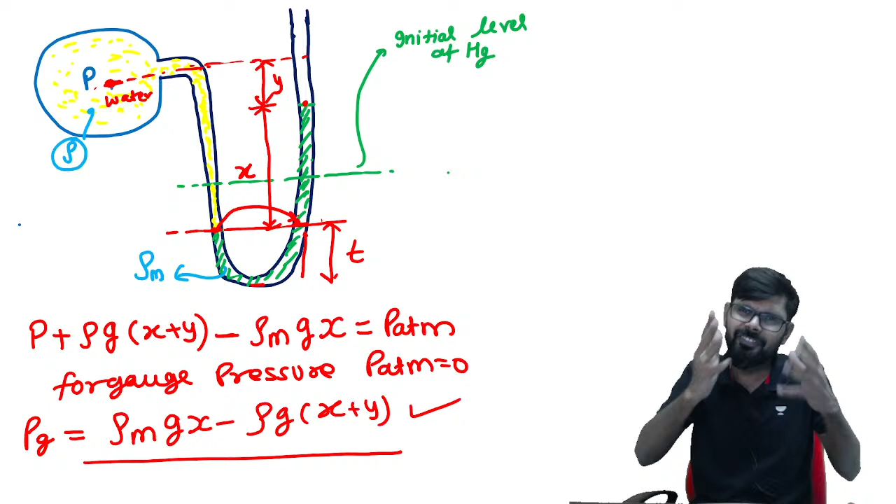Rise in manometric fluid is not... no, the internal weight of the manometric fluid is not going to be considered. Compared to the pressure, that weight is negligibly small. Even that fluid itself has some weight, but we don't consider self weight in the system, in any subject. In any subject, self weight within the system is never considered. Self weight is not going to affect our analysis.

Suppose you want to push your car. Suppose a car is there and it has some battery problem. Listen here, who is asking? Rudraksh, you are my favorite student, that's why I'm giving you this answer. Otherwise I don't generally give these type of examples.

So suppose you are sitting in a car and you want to start the car by pushing it. Sometimes you have to give it a push, right? Can you push the car when you are sitting inside the car? No. Even if you apply the same amount of force while sitting inside the car, it still won't move forward. Even if Hulk sits inside the car and you tell him to push, it still won't work.

He will not be able to do that because now he is an internal part of the system itself, and that force is going to be an internal force. Are you getting my point or not?

Now, if you come out and apply the force, it will easily go, because when you are applying from outside, it is an external force. That's why we always deal with mechanics using the word load, not forces. We don't use the word force mostly, we use the word load, because load deals with external forces.

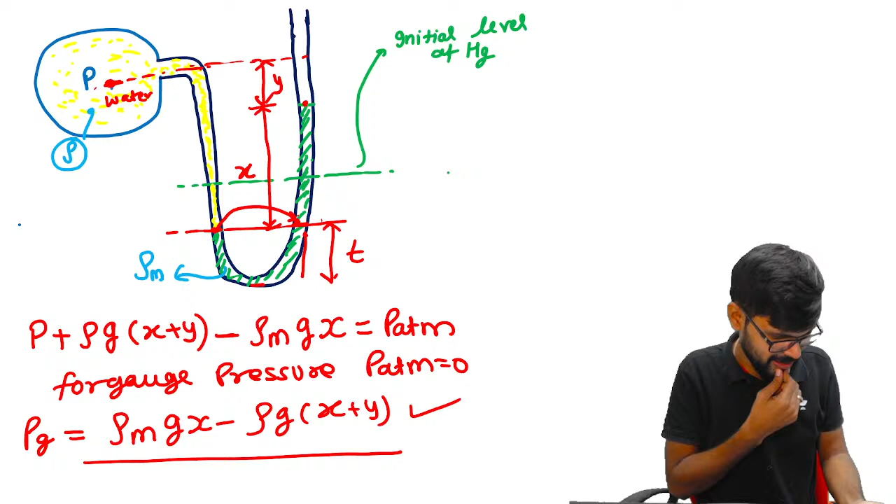Who understood this example? Tell me, do you understand this concept? Yes, very good, very good, most talented people in the world.

Okay, so for today I'll stop here only.

U-tube manometer cannot be used for vacuum pressure. For vacuum pressure, if you try to use it for vacuum, then the manometric fluid will enter into the container.

This is a container. Now you are attaching a U-tube manometer, but what is there in the container? Vacuum is there, so this manometric fluid will enter into the container.

So sir, what to do? Some changes are required. Who will do that changes? I will do that changes. Okay, very good, very good.

The reason for using mercury, I'll teach you. U-tube manometer in series, why we are using U-tube manometer in series, with 2 manometers, then problems. Okay, so basically most of the concepts are over. After that we will solve some very good problems like this.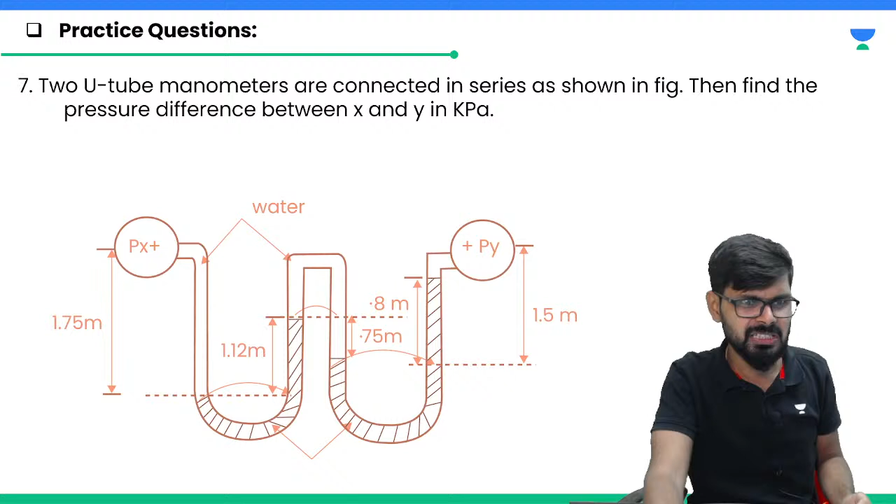So look, this problem is a U-tube manometer in series problem. Wow sir, so good, this is a single column manometer. Wow, how nicely you teach sir, wow sensitivity, wow sir wow, inverted U-tube manometer, wow what fun.

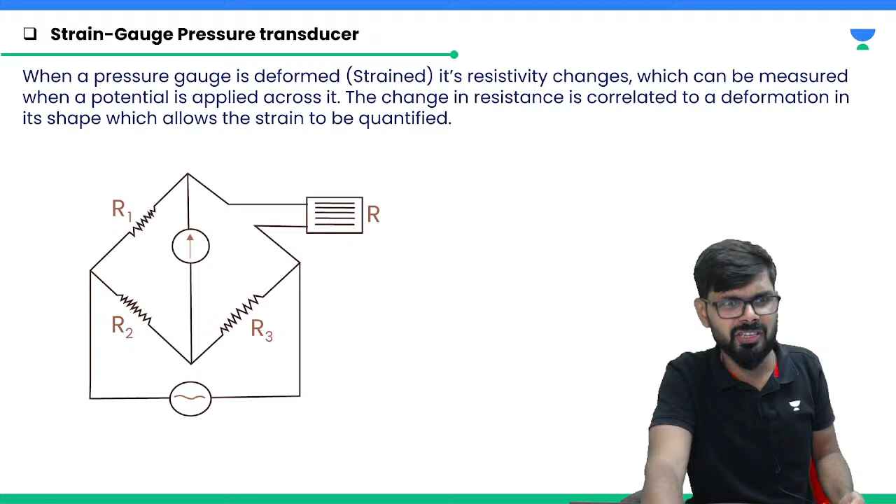I will not teach the Bourdon gauge, sorry, because it's actually not required. Forget it, Bourdon gauge is done. I also won't teach strain gauge pressure transducer or piezoelectric pressure transducer.

But I will make you solve these questions, previous year GATE questions. This one was asked in GATE 2024. So tomorrow this chapter is going to finish.

And after that I will start one of the most important and difficult chapters, that is hydrostatic forces and buoyancy. Shall I stop here?

Okay, let me read your comments. But I asked, there will be a rise in pressure due to expansion of mercury when the fluid is hot like steam. That also I am not considering, beta. Okay, that you are asking.

Temperature effect I am considering as not there. If temperature effect is there, then thermal expansion or thermal contraction effect also you have to consider, that you have to minus, but that we are not considering.

There will be no single question that asks for that. Your doubt is genuine, beta. Your doubt is genuine, Rugdash. Your doubt is genuine that if, suppose you are using hot steam, right?

Hot steam will enter, then it will increase the temperature of mercury, and mercury will expand because of thermal expansion. But that thermal expansion I am not considering at all, and it is not part of fluid mechanics either. Even if it comes, the simple logic is you must know the thermal coefficient of mercury, meaning by 1 degree change what will be the expansion, and that expansion you have to minus from actual length. That's it, so that is the case you can do, but it is clearly not required, beta.

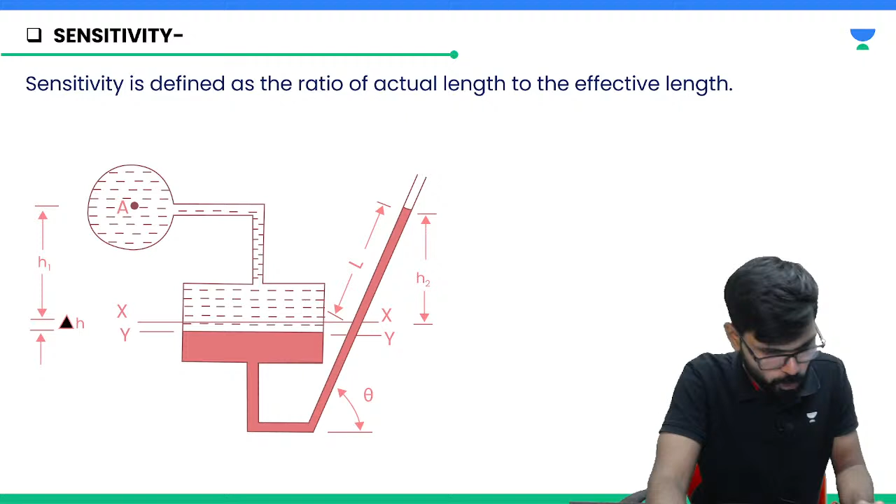Hydrostatic paradox force concept, please repeat it once. Okay, I will repeat it for you, but you have to wait a little so that other people's time is not wasted. Datta, don't worry, I'll repeat for you, but you have to wait some time because I want to make one very important announcement again.